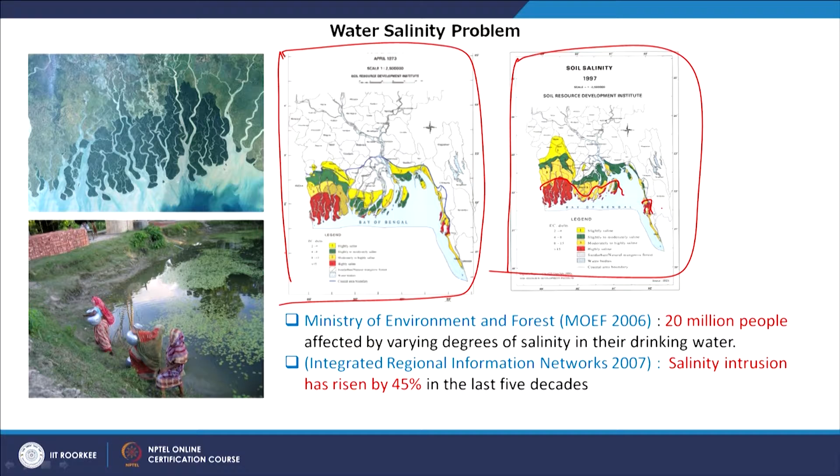As I said, during the late 1970s or the beginning of the 1980s, the Bangladesh government, supported by the United Nations Children's Fund, UNICEF, initiated a mass project installing shallow tube wells, STWs in short, to provide safe drinking water to the rural population suffering from waterborne diseases such as diarrhea and cholera due to contamination of drinking surface water.

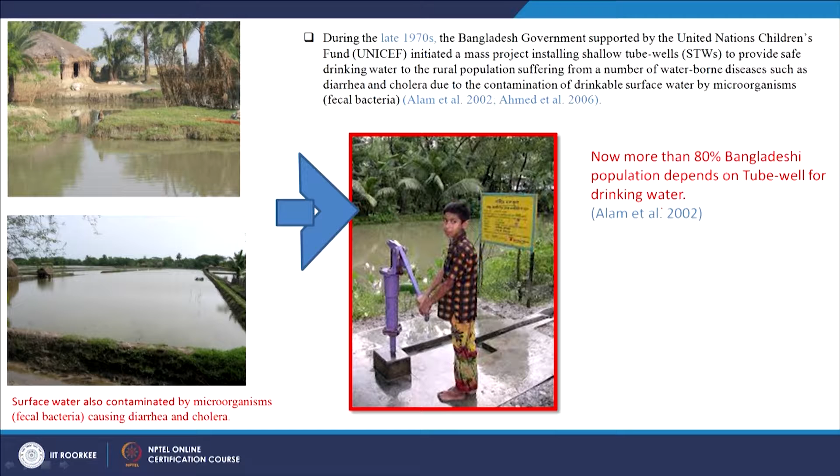Now more than 80% of the Bangladeshi population depends on tube wells for drinking water, but they are affected by water arsenic contamination. 1.2 million people in Bangladesh already have recognized, identifiable symptoms of arsenic poisoning, and 30 to 40 million people are at risk, directly or indirectly, because they are drinking arsenic-contaminated water. It's not a small number, 30 to 40 million people.

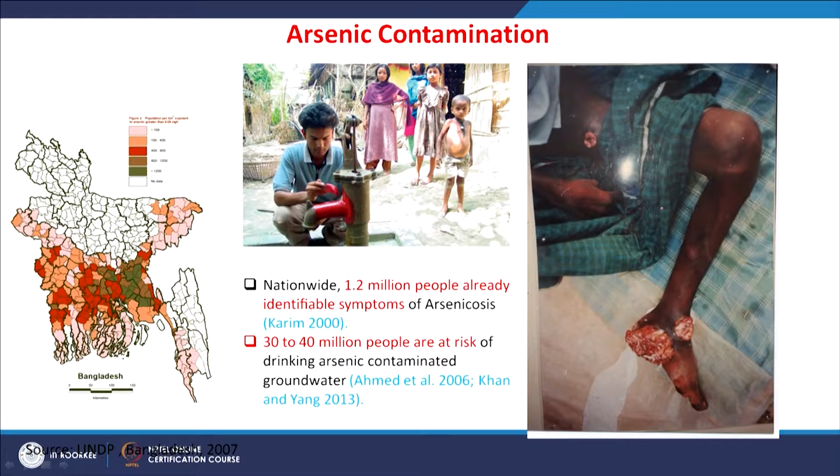Then what is the solution for this? You can see water, but you cannot drink it. There is a lot of water here, they don't have water scarcity as such because it's a coastal area. You can see water every day, but you cannot drink it, neither surface water nor groundwater.

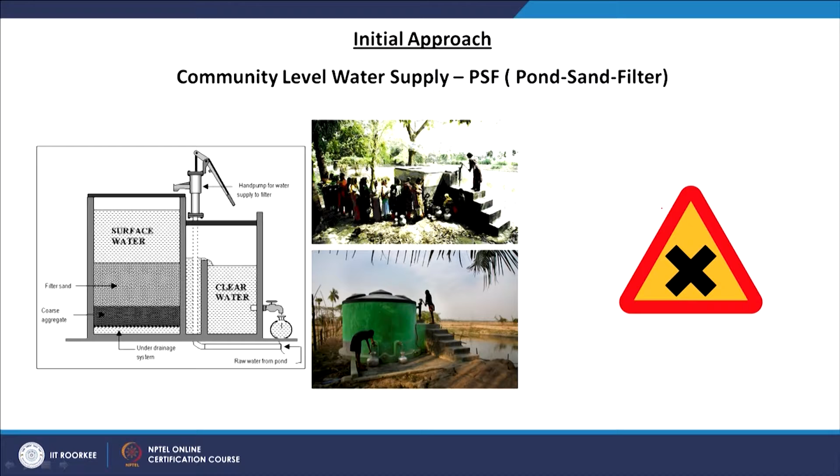What is the situation? Some people came up with the idea of community level water supply, the pond sand filter system. You collect the pond water and then, with some kind of sand filtering system, it's aggregated and comes out as clear water. But there are a lot of maintenance issues and it's not working very well. It's called PSF, pond sand filter, but people are finding it doesn't really work at all to provide drinking water.

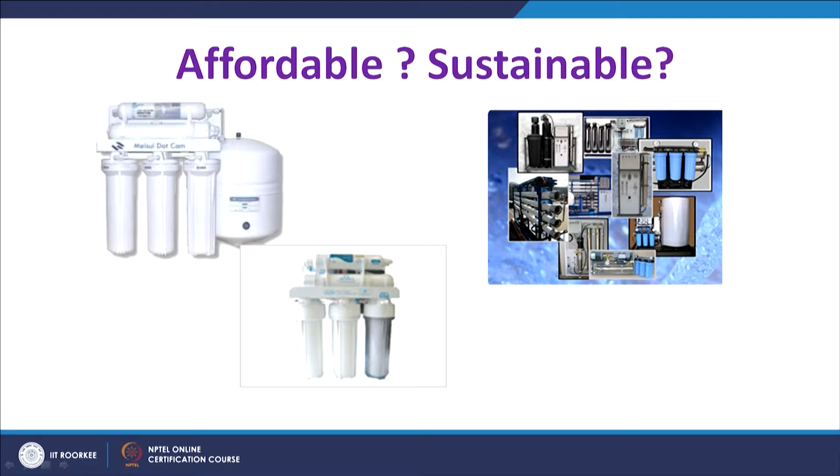There is another solution: providing water filters to people, which would work to some extent, not badly, to provide better water. Though scientists aren't very sure it can really reduce or eliminate arsenic, it's still not very bad. But are they affordable? The people in coastal Bangladesh are among the most poverty-stricken people, they are really, really poor, a large number of the population is very poor. Can they afford these filters? This is the big question, right?

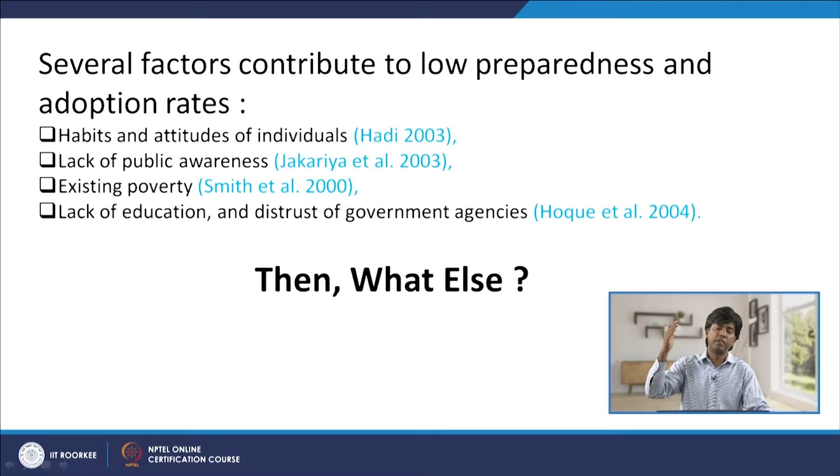So people are saying now that we need alternative drinking water in this area, but scientists find that people are not very encouraged or motivated to adopt these alternatives. Several reasons are given. People have a habit and attitude kind of problem, they become used to what they are drinking. They would say, my father, my forefathers, my grandfathers, my great-grandfathers, they all lived here drinking the same water. They didn't have any problem, they lived 70, 80 years without much issue. Why should I bother? I am used to it, I have become resilient, so don't worry about me.

Well, this is one perspective. Another is along similar lines, that people have a lack of awareness, maybe they don't realize the seriousness, severity, and vulnerability of this disaster. Another factor is existing poverty. People are really poor, they have so many problems in life, their entire livelihood is at risk. All households are at risk from a poverty, income, and economic perspective. When they are in crisis every day because of their financial condition, it's really tough for them to look into other matters, it's a kind of background risk.

Also, there are other factors people identified: lack of education, and distrust in government agencies and NGOs. They cannot believe that these non-governmental and governmental organizations are really honest in promoting any kind of alternative drinking water technology.

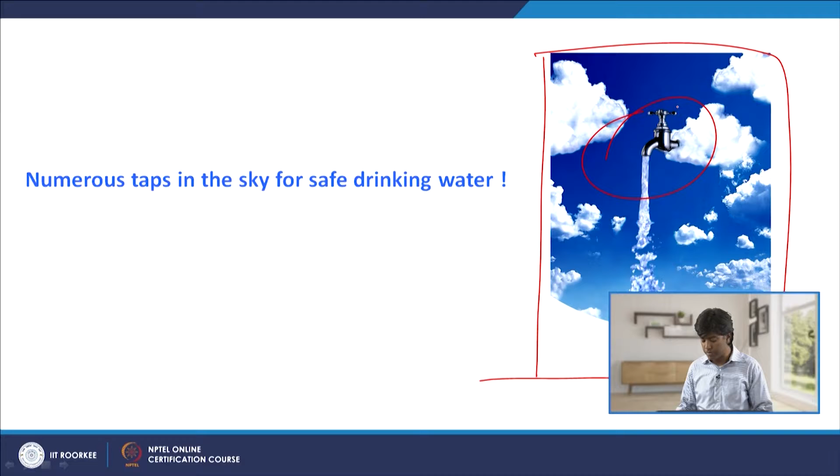Some people came forward accepting that challenge, with a very innovative and simple idea. They said, hey, come on, we actually have plenty of water, numerous taps in the sky for safe drinking water. The sky will provide us drinking water, don't worry. Like this tap, you get gallons and gallons of water. Who says we don't have water?

There is a Japanese non-profit organization, People for Rainwater. They called it amamizu, which in Japanese means a kind of rainwater that will bring smile to every home. Therefore, diffusion of innovation is inevitable.

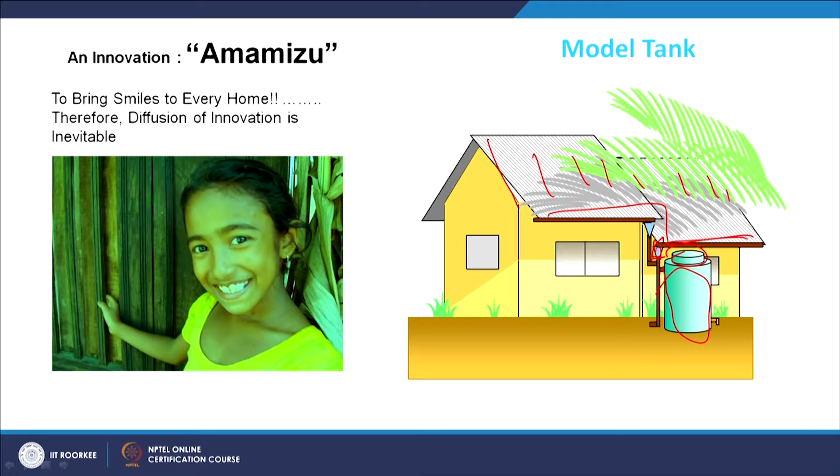This is a model tank at the household level. During the rainy season, you collect water from the roof, it gets channelized, and you store it here. It's very simple, with a small net, pipes, and faucets. This is the small, simple technology you need.

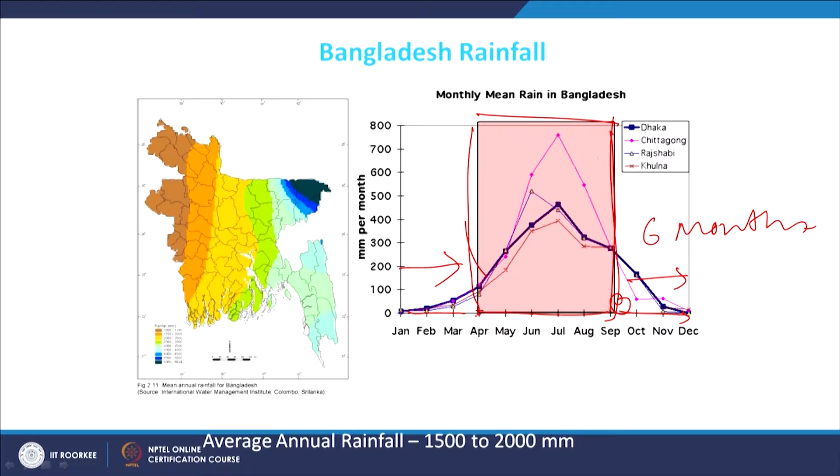Bangladesh has very good rainfall. From April to May you get rainwater, continuing till September. So from October to March, six months, you need stored water. You preserve water during the rainy period and continue using it for these six months, since during the rainy time you always have rainwater and don't need to worry. They have an average rainfall of 1,500 to 2,000 millimeters, but it's concentrated only in these months.

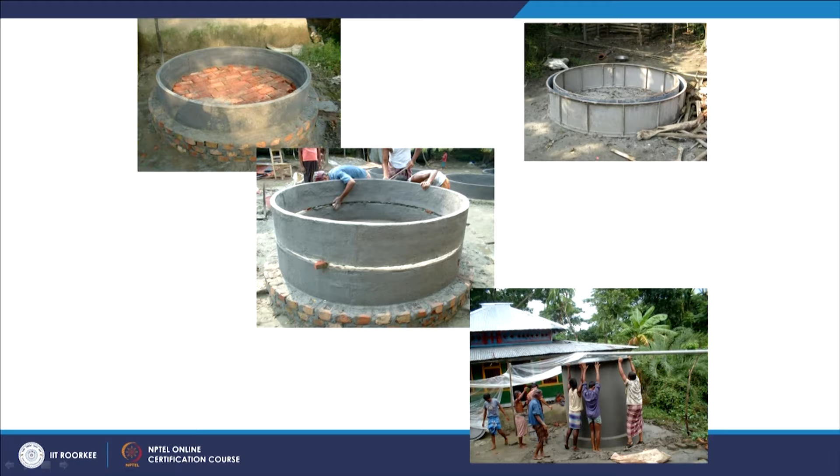Some people came up with the idea that if we have around a 5,000 liter water tank, then a family of 4 to 5 members can easily run 6 months with this preserved water for drinking purposes. So this is a small tank at the household level. He's an NGO person, and they are the users. We need to install this tank, which is a little costly. So the challenge is to solve the drinking water risk in Bangladesh, you need to install many of these.

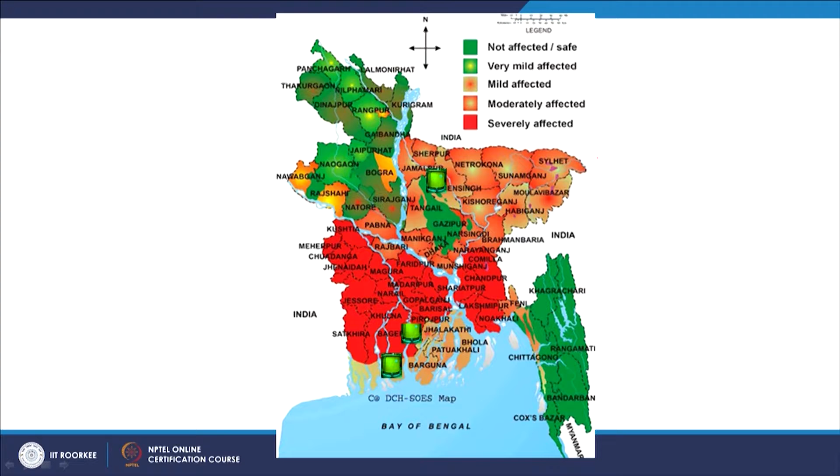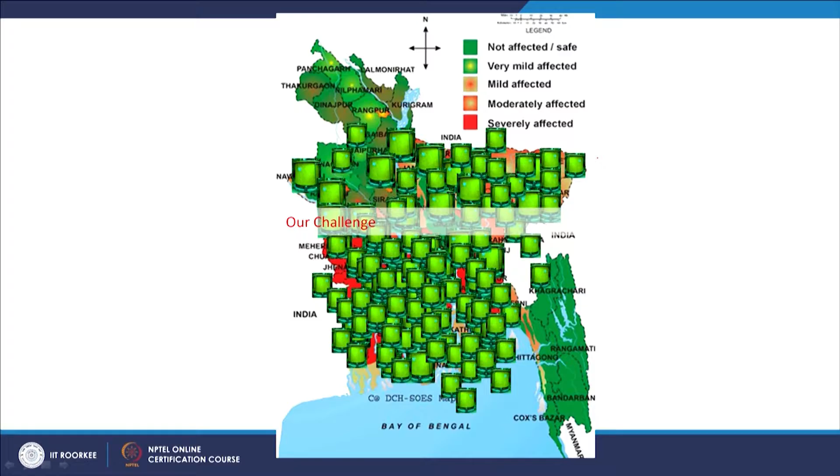So this is our challenge: how can we recover from this, how can we promote this rainwater harvesting? Given that, how can we solve this problem? As planners and practitioners, we say you need to promote this tank to reduce drinking water risk in Bangladesh.

Tell us, what is the solution? People are poverty stricken, people have habit problems, people have the problem of risk ignorance, so they are not considering so many problems: one, the socioeconomic problem, another the educational problem. During such complex situations, the government is hiring you and asking what solution you can give. So in order to encourage people, you first need to know what they need, what is the role of information, what kind of information we should provide and how, so that they would be motivated and encouraged to install these tanks.

So this is the idea: a small effort. We don't need a very gigantic big effort, just a small one. This small effort can have a very gigantic impact, like diffusion of innovation. This innovative technology is inevitable for sustainable climate change adaptation and disaster risk management. So putting a lot of small power together adds up to big power, ending at a very gigantic big power.

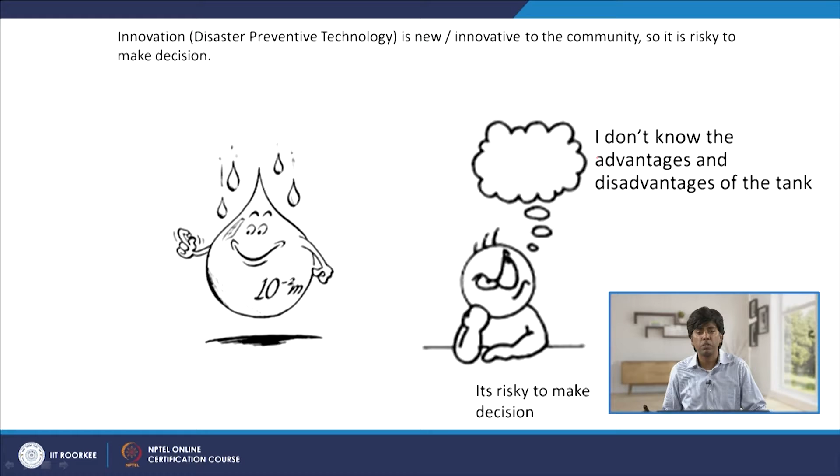So I need information because this is new. No one before tried this one. This is an innovative technology. So innovation is also very dangerous in some sense because this is new, and as it is new, its advantages and disadvantages are not known to the people. So people have no idea. They have to make a decision of adoption, decision of installation, in an uncertain situation, right?

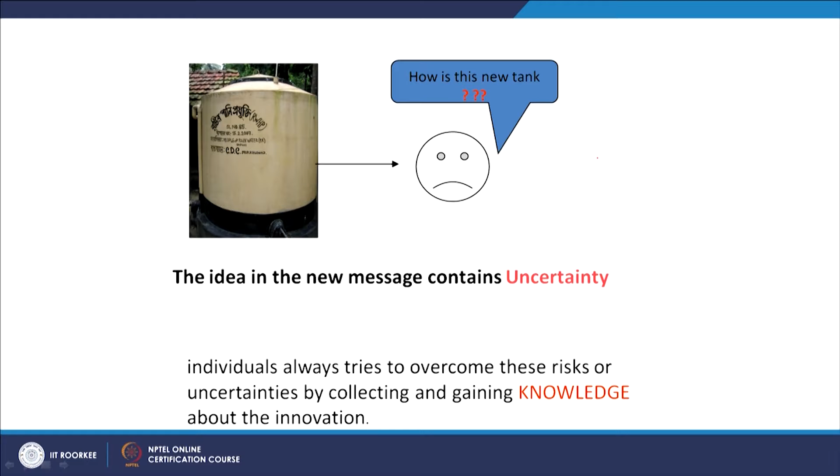If you are buying something that already exists in a community, no problem, you can buy it. But if this one is not available, never came before, how would people make a decision? That's a big question.

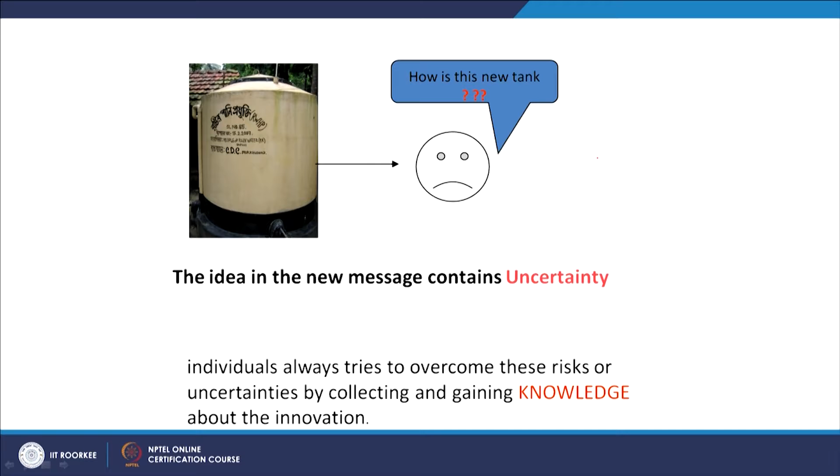So what kind of information do people then need? How would they know that this is good or bad? Will this work for me or not? They need information, right? If we provide them information, they would eventually know. They would judge and evaluate this innovative technology. It will remain innovative, but it would not be that new, because they would have some feedback.

So now people need to collect information in order to reduce their uncertainty. No one likes uncertainty. Everyone wants to predict their future. Any kind of risk is always in the future, that's true. We always face risk in the future. Future risk cannot be in the present or the past. It's always in the future, like fear.

So it is always in the future. No one likes an uncertain situation. They want to minimize the uncertainty, so people would like to collect information. How can they collect information about this, this person?

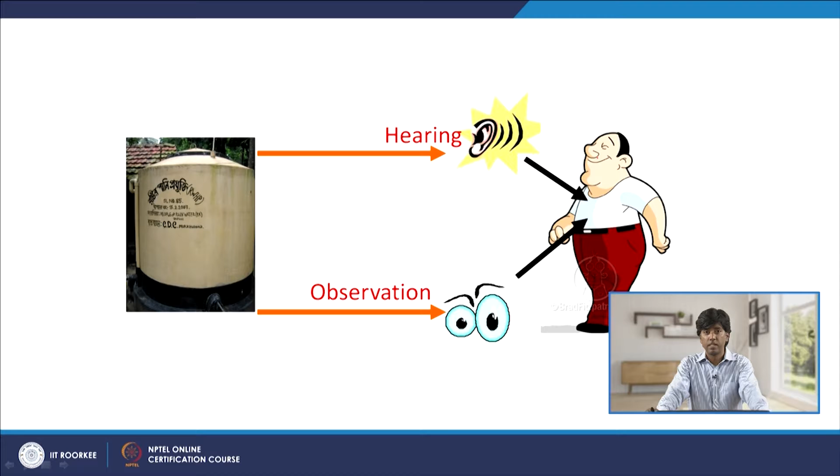They can collect it, one is through hearing, right? Another, they can collect it from listening or hearing from others. Another is observation, or watching this somewhere in some place, a friend's place, bazaar, market, an anonymous person's house. Hearing would give a software kind of knowledge, like what is the function of this, how does it work, what are the utilities, effectiveness. This could come from friends, relatives, or neighbors they don't know, or from radio, television, anything.

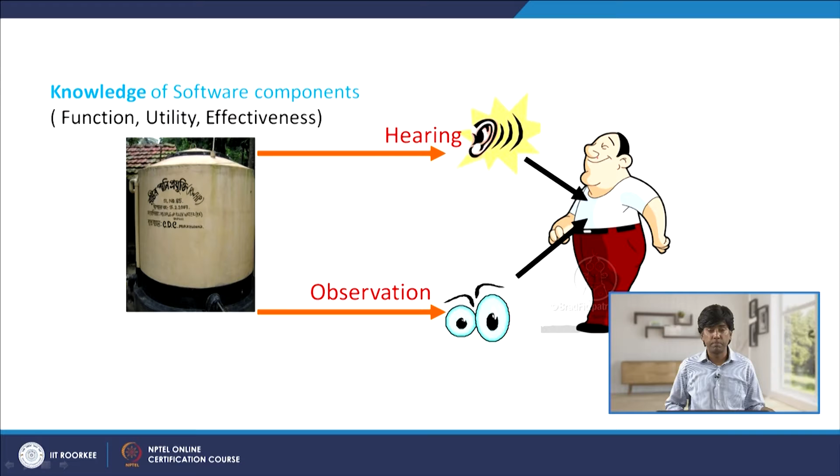It could be human networks, social networks, anything, mass media. So he or she can collect information through hearing, but hearing can only allow you to collect information about the software part, not the hardware part. For the hardware part, you need to watch it.

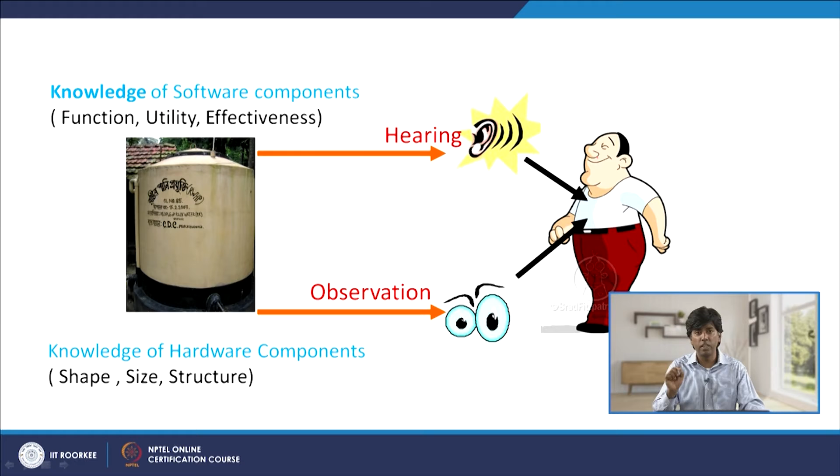What is the shape, size, structure? Is it beautiful or not? Is it big or small? Is it round or square? These are also very necessary, because maybe I don't have space to install it, or maybe it would look ugly if I put it in my house. So these hardware components you can only get through observation, and then it would complete my knowledge.

But this is a model of diffusion of innovations developed by Rogers. They say that knowledge is important to make decisions - knowledge meaning information, which we can get through hearing and observation. But knowledge does not immediately lead to adoption, no, it takes time. Before making adoption decisions, we need to go through persuasion and decision stages.

That means, what is the utility of that, from a subjective point of view? I need more information - subjective interpretation of whether, in my condition, it will work or not. This kind of context we get is what we call discussions. So we need three kinds of information: hearing, observations, and discussions. These three kinds of information would really help reduce uncertainty in decision-making, and then I would make a decision. In my next two lectures, I will give you examples from Bangladesh, the results and feedback, how people collect this information, what kind of networks they use, and who plays a bigger role. Thank you very much.